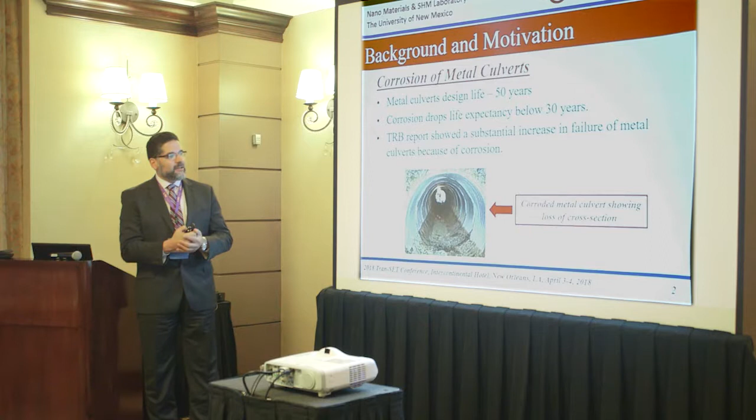So background quickly about why we are doing this. What is the motivation of the project? Nationwide, and actually in many places worldwide, metal culverts are being used under highways, an important structure for floods and flood control and for protecting the highways. Many of those structures in the United States have been built in the 1950s and the 1960s.

So they are a great example for the work Tran-SET is looking at, which is how can we maintain this infrastructure, because many of those culverts nationwide are corroding. In New Mexico, that's the case. In many other states, in Texas, in Louisiana, as I heard, this is a problem, and many people are seeing this as a problem.

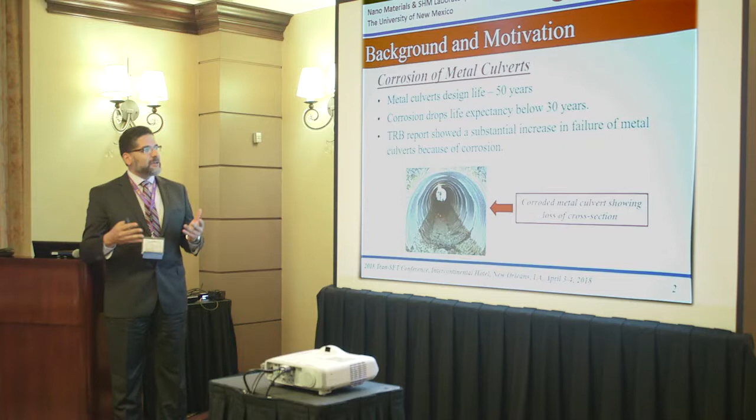So with the current rate of corrosion of those metal culverts, corrosion is inevitable, and the cost is not about the repair or putting in a new one. It's the cost of closure of those major highways. In New Mexico, we have this case happening under I-40. I-40 is a major highway connecting many states and going through Albuquerque. So if you have a case like this on a major highway, that closure is going to cost a few million dollars if you close that highway for a day or two.

So our idea was actually to slide a glass fiber reinforced polymer pipe. And I say pipe, but it does not have to be a pipe. It can be any cross section, because those GFRP sections, or what we call profiles, can be made to any section using filament winding. And they need to be designed to match the existing culvert cross section.

So we are working with the DOT on taking the exact shape of these existing culverts using a 3D imaging technique, generating these profiles using the glass fiber polymer sections, and then grouting the gap between them with a polymer concrete or grout material. So the design will include the design of the GFRP profile section and the design of the polymer concrete to do the load transfer.

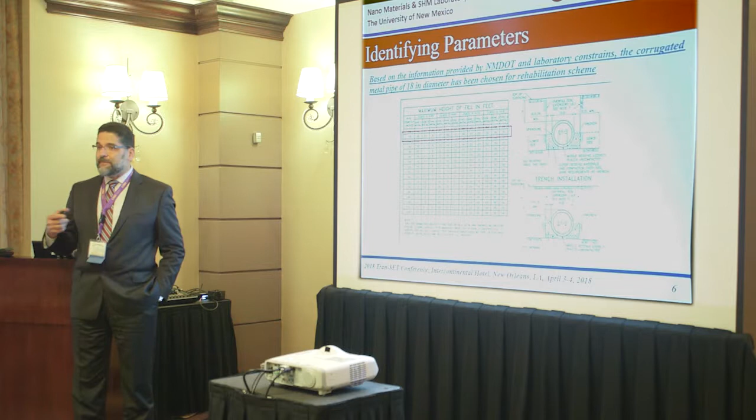We decided to take an 18-inch culvert, and many of them, by the way, are not circular. Many of them are elliptical shapes and other shapes. But we took a circular one that is existing, and we know its height, and it's 18-inch, and we decided to replicate a case like this.

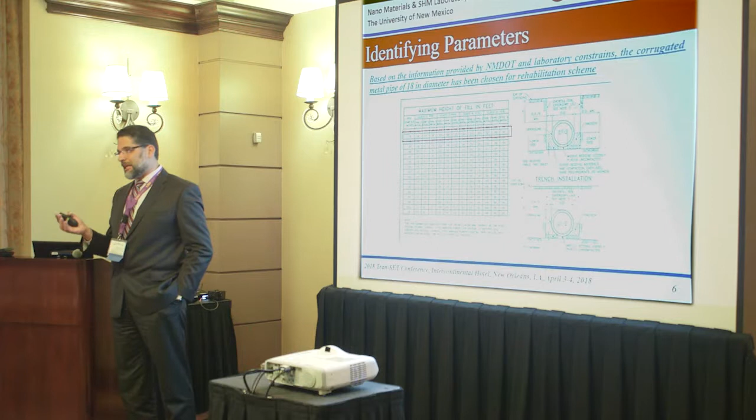And all of this, we are showing here for metal. This could also be done for concrete culverts. Could be done for other types of culverts with the same technology. But here we are presenting the case for metal culverts.

So once we identified the design, we went and got a new pipe that is the same exact dimensions that is used in the culvert in New Mexico. That's an 18-inch. We use 90-inch length of the pipe just because of the limitations we have in testing. Otherwise, we can do the full-scale testing.

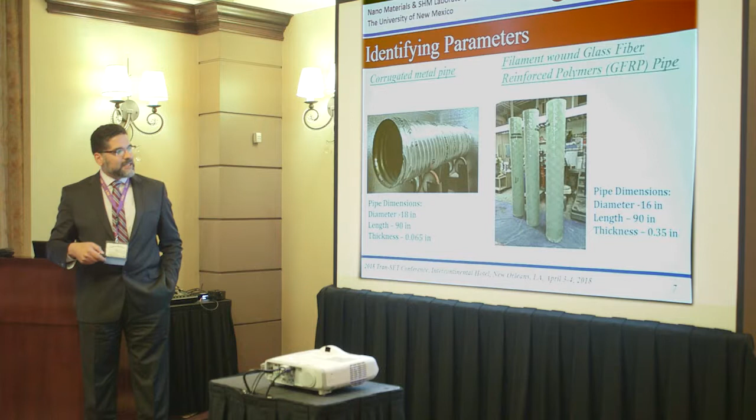We worked with a company in Arizona to actually do the filament winding for us, that would fit exactly that dimension and that profile, and that's a 16-inch GFRP with a thickness of 0.35 as per our design to take the load on this.

To start the work, we need to do some surface grinding of the profile of the pipe or the GFRP section. Again, if this is being produced for that project, that step might not be necessary. But this is again just a glass fiber profile produced for any other use as well. So we have to roughen the surface to make sure there is good bond.

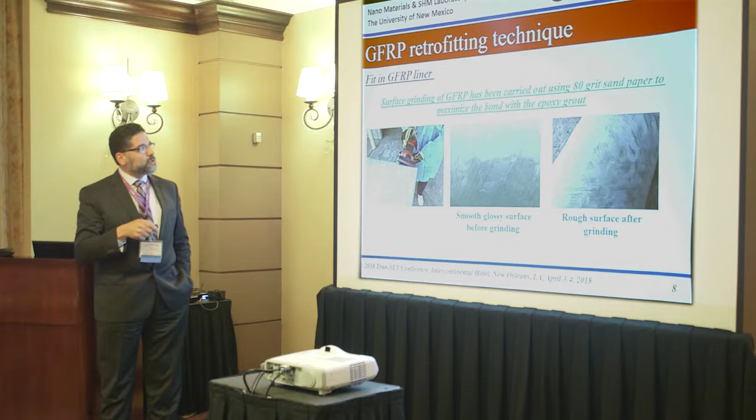Another important thing is we have to work with the producer to identify what type of resin is used with the GFRP, and that's what we did, because there are a few resins usually used with GFRP. Could be epoxy, could be vinyl ester or polyester. In this case, we asked them to use an epoxy because it's got to be the same resin and epoxy material to be used with the grout to maximize the bond between the polymer concrete or grout and the GFRP pipe.

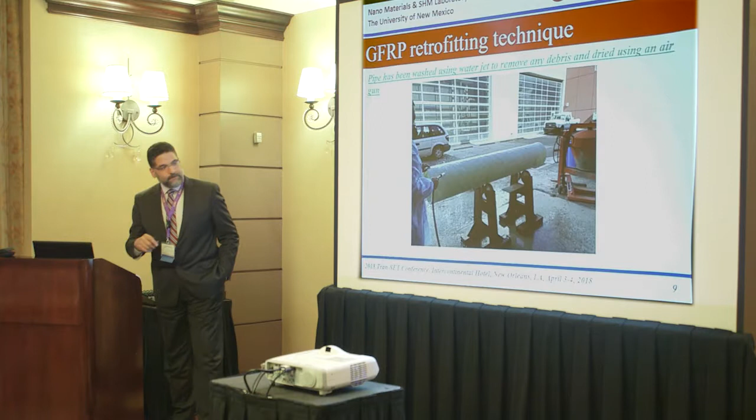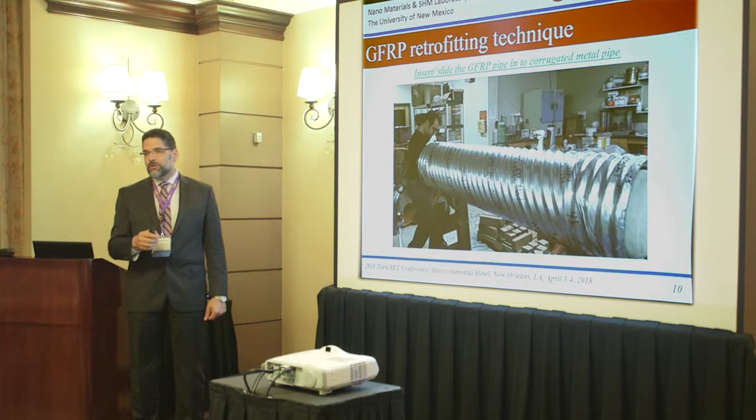So here we are showing that after all the grinding, we are cleaning and washing with a water jet the outer surface to be ready for application. Next we are showing an example of the sliding. So this is just the pipe in the lab, and all you need is to have some spacers to be able to slide the pipe in the steel pipe. Of course, in the field it will be a little different, but we are just showing here it's absolutely simple, nothing difficult.

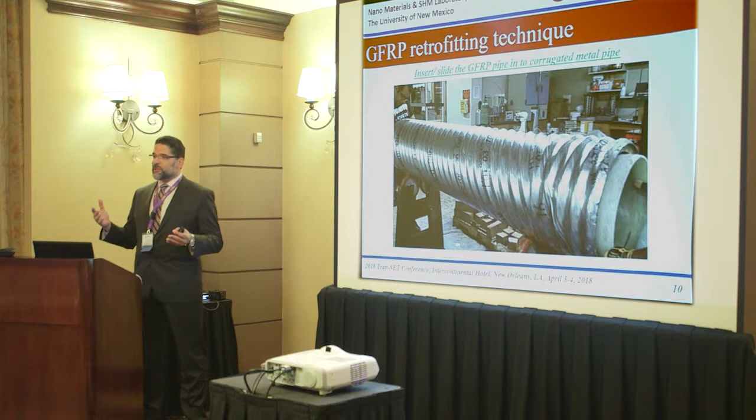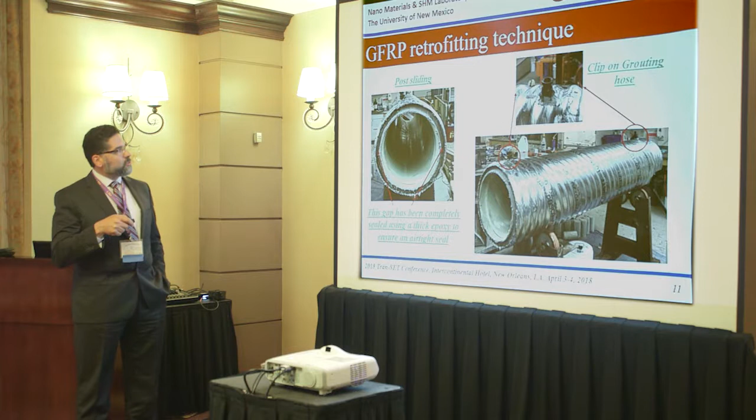The next step for doing our test, our simulation, is we actually went at the end post the sliding, and we put a thick epoxy layer at the end, which can be another wood section at the end, which you would need to do at the exact culvert so that you limit the place where you are going to have the grout. Again, that will be part of the design of the real project.

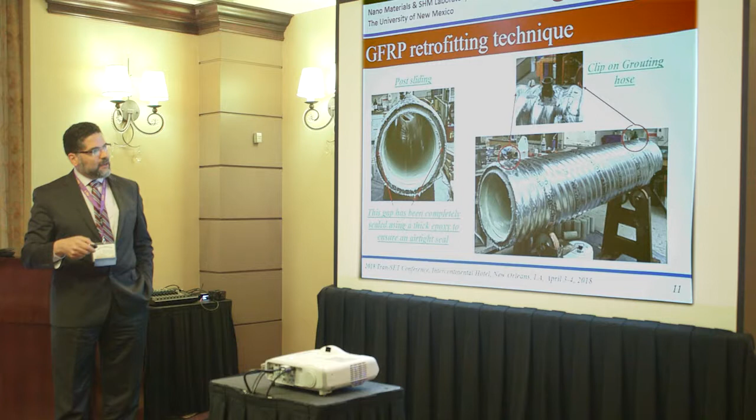We have a hose connected to the pipe here and here, and that will also need to be designed in the field when this is field applied, so that you can pump the polymer concrete on one side and get it on the other side, so that you make sure you fill all the gap.

So this is producing the polymer concrete. We have an epoxy resin. We've done about 10 trial mixtures until we reached the trial mixture with the polymer concrete that has the required shear strength, the good bond with the GFRP, and also good flowability to allow it to flow in the gap, because we have a very thin gap. We have less than 1 inch, because we talk about inner diameters, but we have corrugations in the steel pipe.

So we mix the materials, add filler, 3-5 minute mixing, and basically it's an amine-based epoxy similar to the GFRP, and then we have this hand pump which can be easily used to pump the material. And again, trial mixes were required to make sure that will work. I'm going to show here a quick video on the grouting method.

So this is the research team who actually does the work. And you can see here the polymer concrete going on the other side from the other part of the pipe after filling all the gap.

So after this, we started planning to do the experimental testing for the full-scale pipe. So this is the steel pipe, as you can see, with the GFRP inside it, with the polymer concrete between them. We waited on it for a week before we did the testing. And we instrumented, this is a 400 kip actuator.

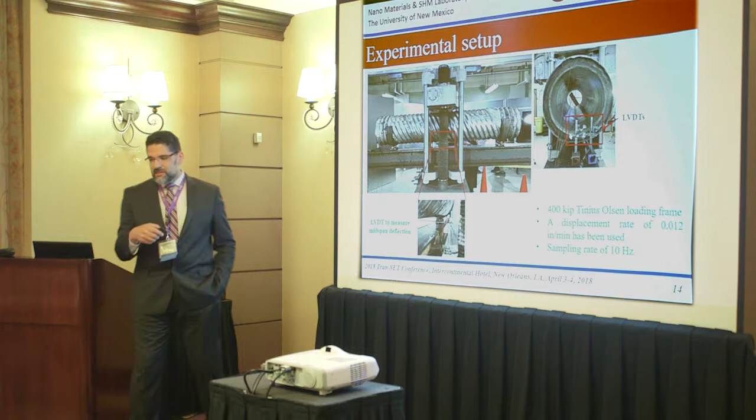We did special bearing plates on both the sides, the top and the loading plates, here to allow the sliding on this side and to allow having the same shape with the corrugation, here to be a pin and here to be a free side. We used different LVDTs and strain gauges to make sure that we are measuring the composite action. So this schematic shows the LVDTs, and these are strain gauges.

So we put strain gauges on the glass fiber, inside and outside of the glass fiber, and strain gauges on the steel. Our objective is to be able to have a profile, make sure that the flexural profile is achieved, and to make sure that the glass fiber is carrying the load as we are doing the testing.

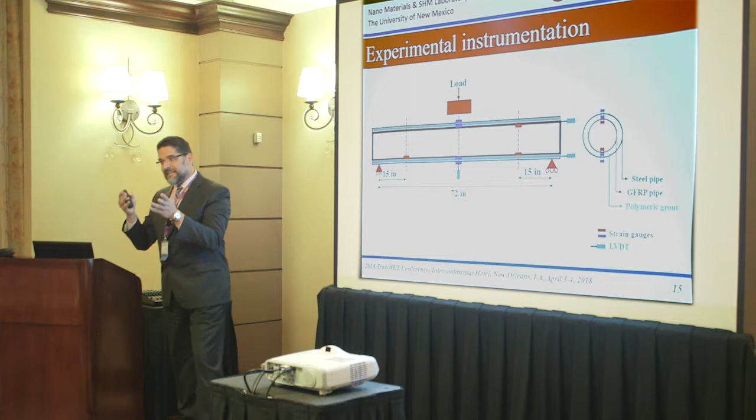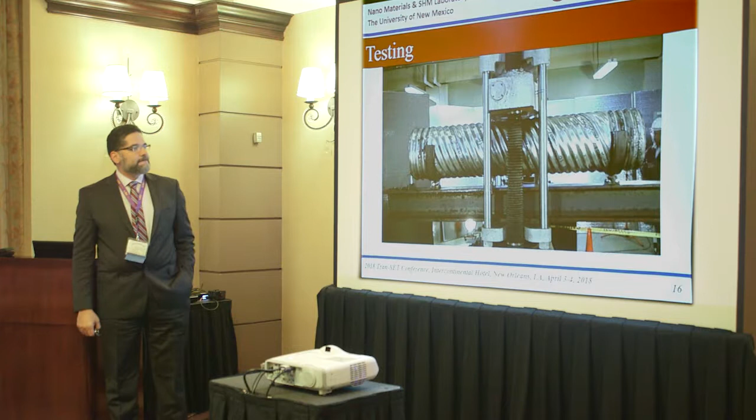We use LVDTs to get the displacement. We also use LVDTs at the end to see if there is any horizontal longitudinal shear movement, if there is a slip that's going to happen. So this is a summarized video. The testing took 5 hours to actually do the full testing. So that's just an edited video.

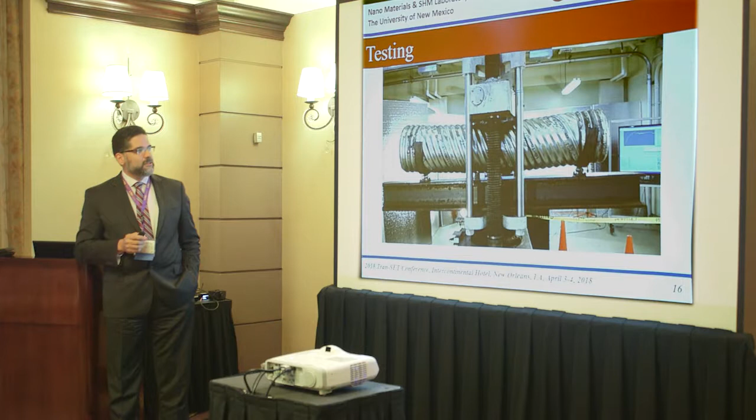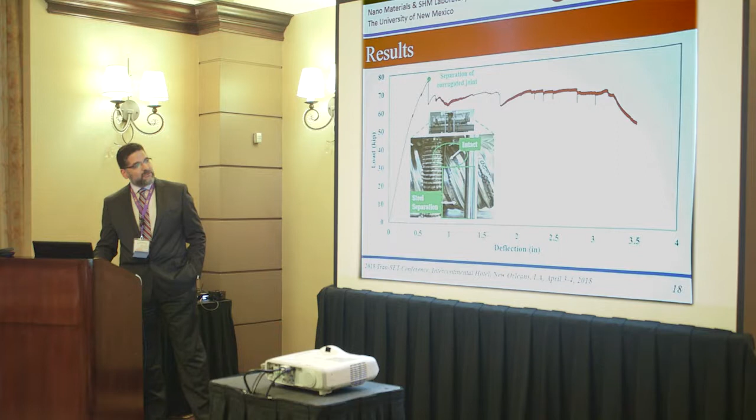So this shows you here the different points where steel yielding with separation of the corrugation happened. And this is where you actually start seeing failure in the glass fiber. And this is the one at 1.8 deflection. So this shows the different profiles and what happens.

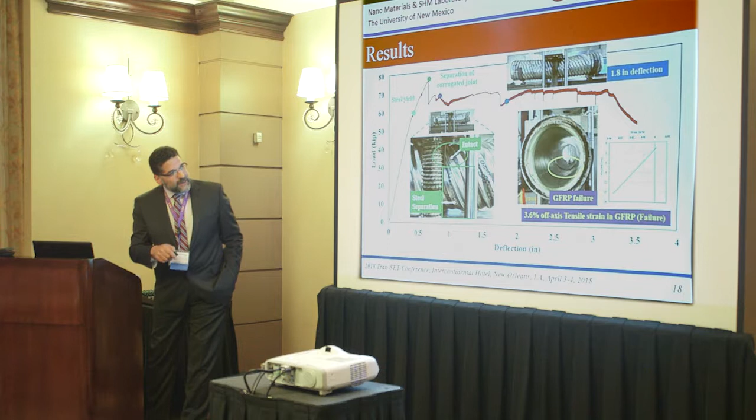Now this is very interesting, because you can see that at 76 kip, the glass fiber failed inside. So you can see failure, which means that the glass fiber is taking all the load, the composite action is working perfectly, and actually the glass fiber is the reason why this section is now carrying 76 kip. This is filament winding at 45 degrees, so the failure was exactly as we expected.

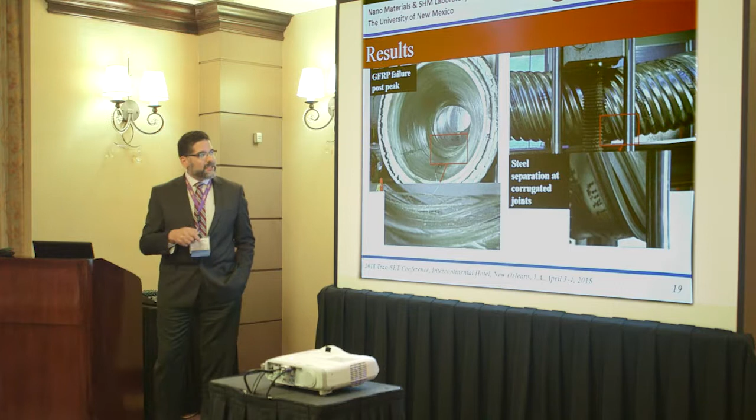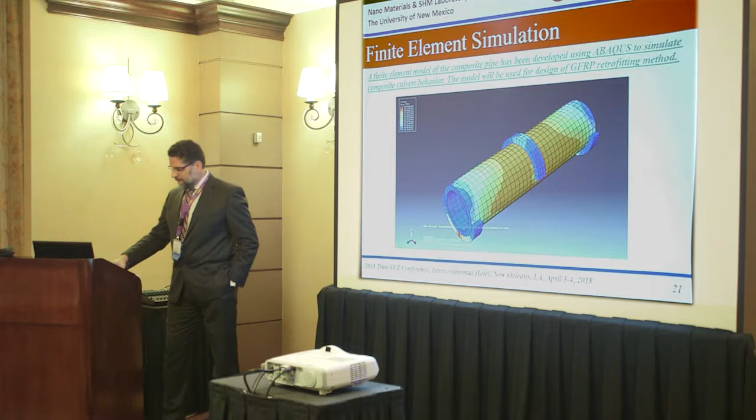So in conclusion, we believe we have done a reasonable and comprehensive retrofit technique that shows that we can actually increase the expected life to 75 years using a GFRP pipe or profile slid inside the corroded metals. Composite action is confirmed. The composite section exerted a maximum yield capacity of 75 with significantly high ductility that you wouldn't see with others. The polymer concrete did not fail, and there was no debonding, which is great.

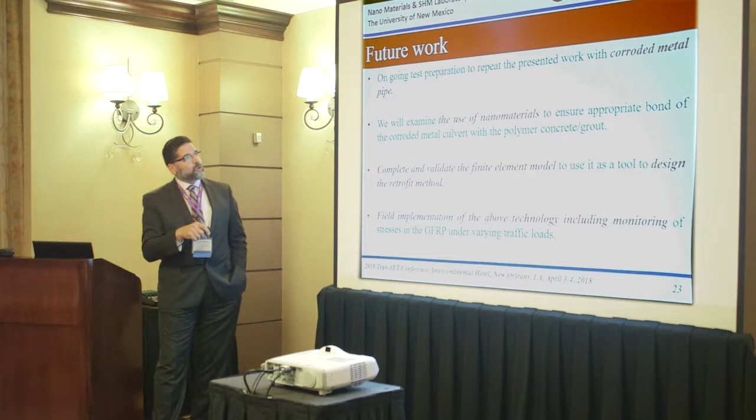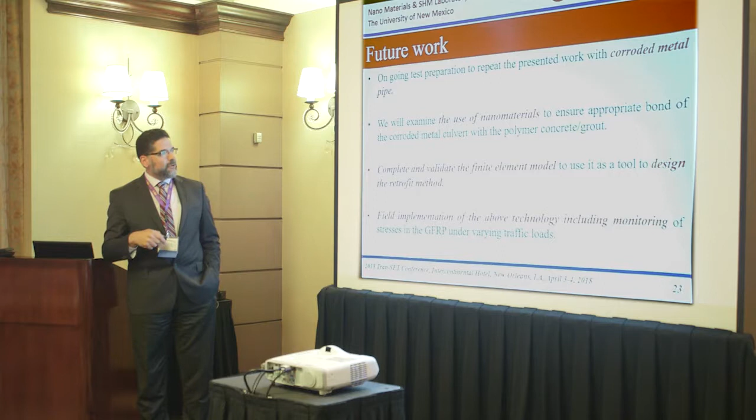Future work: we are repeating the test in our lab now with corroded pipe. So we corroded one pipe completely, and we are repeating that exact test with the corroded pipe. We're adding nanomaterials in the polymer concrete to ensure bond with the corroded steel. We're using nanomaterials to improve both the grout and the GFRP if needed. We will validate the finite element model, as I said, to use it for design. And we are talking with New Mexico DOT on field implementation. They are interested now to field implement this with sensors.